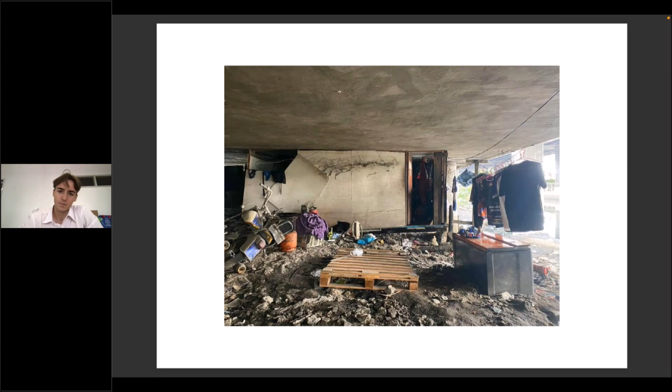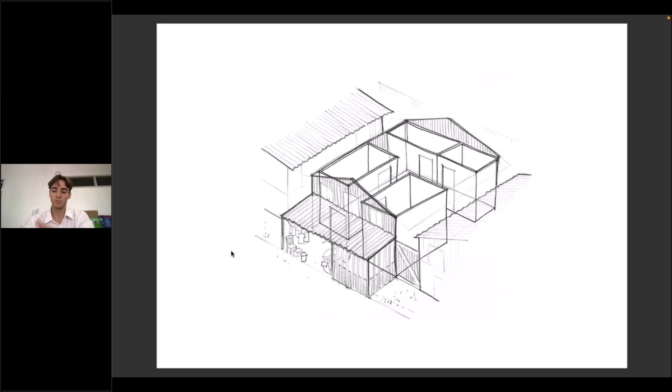They don't use them as proper houses, but we got this blue house example, which is a house that we could think one family is living in. But people in KLONG used to divide the space inside with cardboard, and in a house that is 1 story, they built 2 or 2.5 stories to have storage on the first floor, and like 3-4 families living on the second floor. So they used the existing infrastructure, which is this house with 4 walls, one roof, and one soil, and they made 4 families living in by just extending and dividing the space.

So from this, I wanted to work on this idea of really infrastructure, a framework in which the people who are living there could just design themselves their living spaces, and something that could be really adaptive and evolving, because we don't know if in the end they have to develop something really sustainable in KLONG. We don't know if they are going to be evicted in the end, because it's politically complicated. So it has to be both sustainable and really ephemeral and temporary in a way.

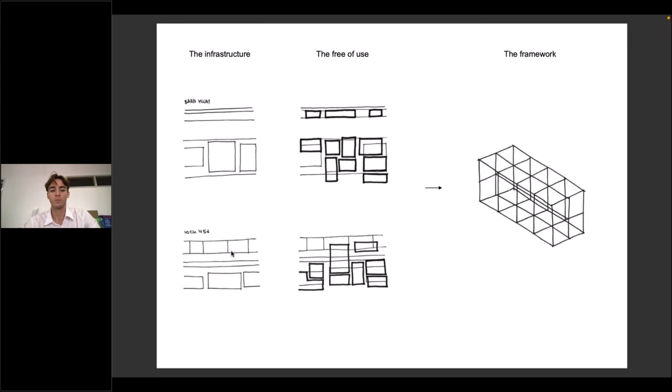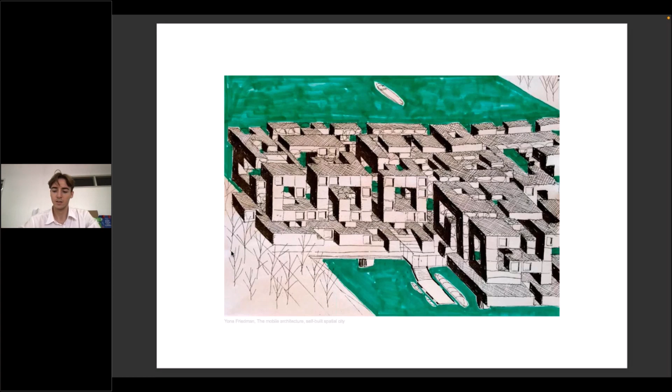So let's start a bit with some references of this idea, and like the drawings of Yona Friedman are a good example of this idea of framework city and self-building city from like a grid. And another example at another scale is the Kengo Kuma Chidori structural furniture elements that are made from one simple stick that can be assembled from one to a big furniture. So it's about this freedom of creating space as we want.

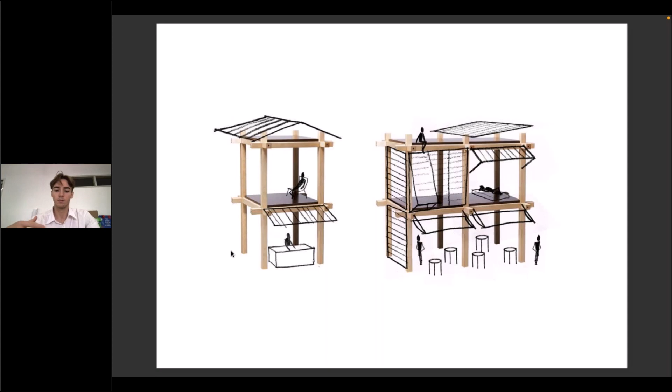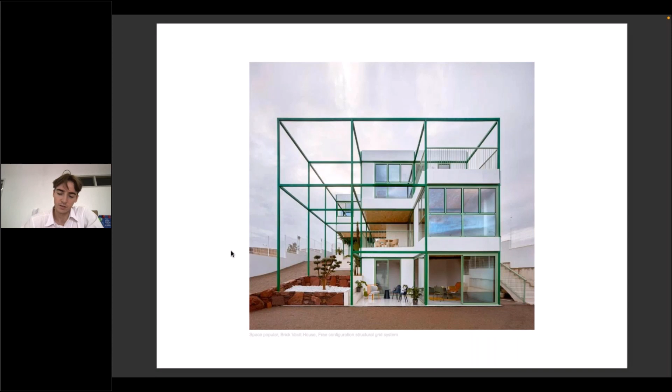And from this, we could imagine that people could just live in such a structural system and develop themselves the space, and that the space could be moving, assemble a new story if they have children, and depending on the family evolution, they could disassemble one place or something like this. So from that, we can see that, of course, it's something that a lot of architects are working on, about the framework, the grid, and the free adaptation of the space inside such frameworks, both on sustainable architectures or on really temporary ones, as the temporary shelters of Shigeru Ban, made of really simple elements like this and only fabric for people to live in.

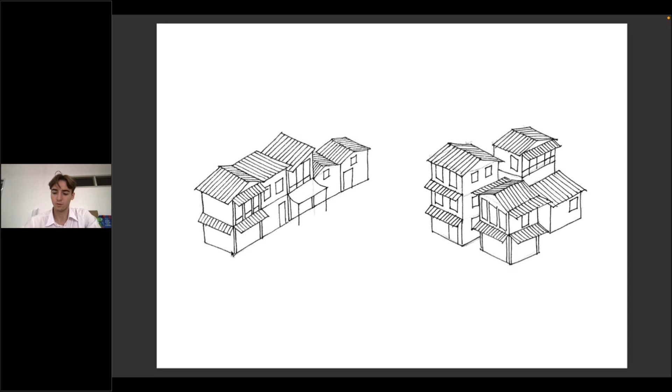So I started from a 4 meters basis, which is a scale that we observed from the existing KLONG houses. So it's a start, and from this square we could, of course, divide it and extend as people already do it in KLONG. And in the end, we could, of course, assemble multiple examples of designs from this 4 meters basis. And in the end, they could like slowly convert or design a new KLONG somewhere else, or just make a better place to live on the existing site.

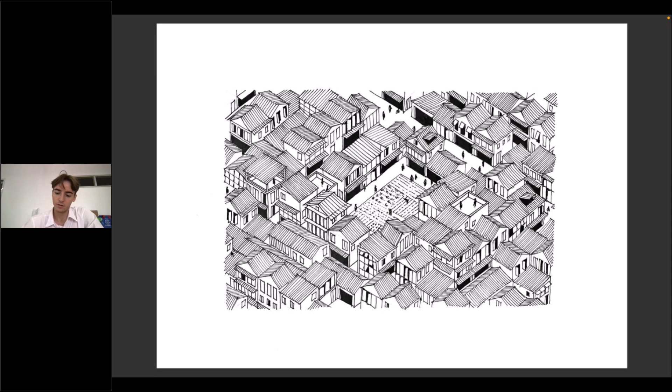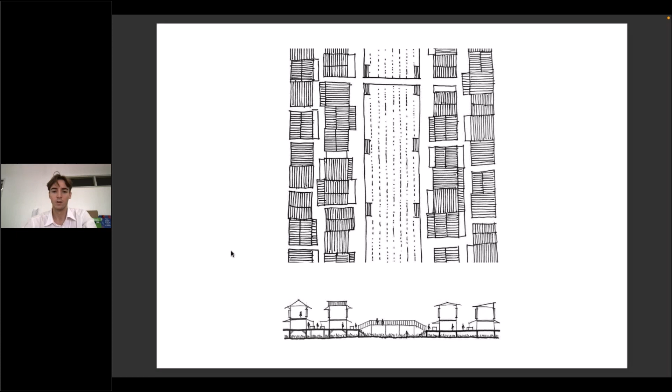Both on the Nongchok province, which is the province which I was talking about minutes ago. It's the land that is the first proposal from the government for them to develop a new slum outside of the city. So they could both develop something sustainable, as they did by their own means there. But my project is not going to be about this. It's just an example of how I want it to be both temporary and sustainable.

But I will try to develop prototypes, 3 prototypes as examples of the freedom of creation from this structural system, starting with a restaurant at the left, a market in the middle, and a laundry on the right-hand side, because they embody 3 of the main activities that people tend to have in the existing slum. It's the most common activities.

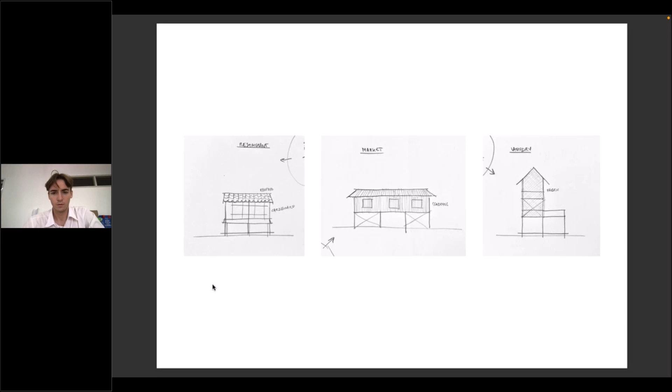So I will try to make them also embody the liberty, the freedom of design, and like the restaurant could embody some architecture, be more sustainable and well done, and maybe the laundry will be an example of something really more temporary and made of scrap, maybe more related to the poorness of the existing families there.

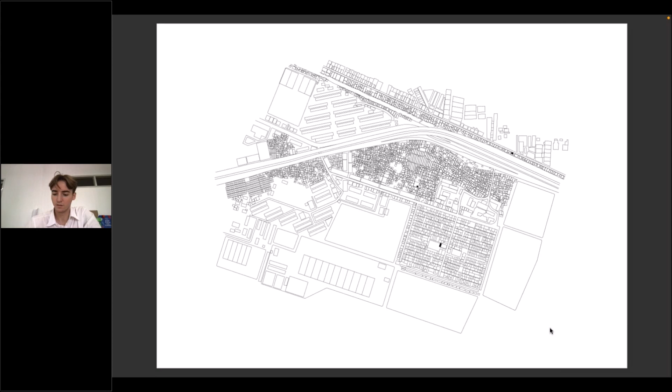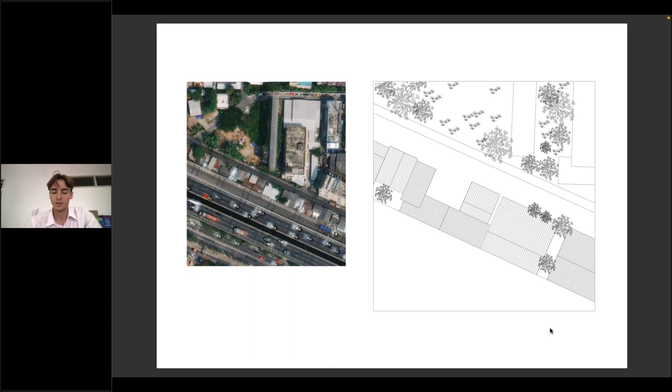And they will be like gathered throughout the slum to be in different communities, to show that this structural system can suit any place and any spatial situation, starting from this first site, which is the restaurant one, in the first community, Ban Kluai, on north of the site. So it will be a restaurant connected to the outside of the slum too. So it could welcome people from the outside of the slum as well as people from the slum. So the site looks like this. Actually, it's an existing house.

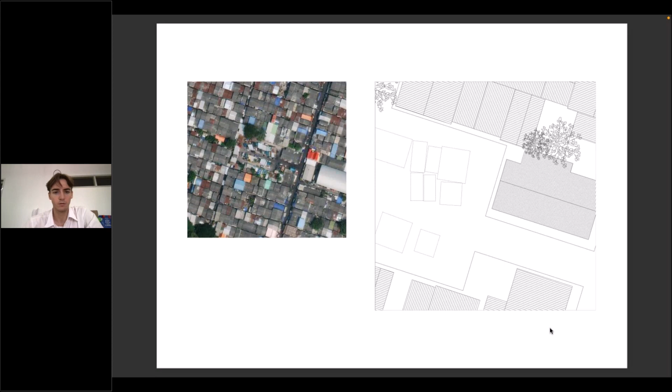The second site could be on the 70 Rai community in the middle, where there is a big parking area. Not that used. In fact, there are some marketplaces during the week, but it's mostly parking. So I could try to extend the existing market.

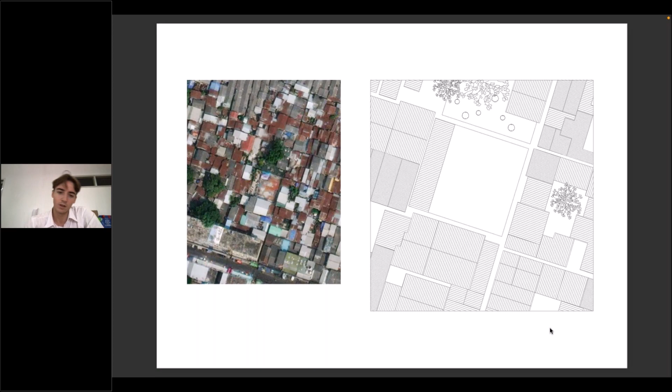And the last one is, I think, a public space designed by some architects. It should be a sport court, but it's not used, because when designers come to KLONG TOEY to design public space, it doesn't work as we can do in the centers of big cities, because the lifestyle of people is not to go hang out far from the house to meet friends. It doesn't work like this. So this concrete bank is quite abandoned, and I would like to design on this one.

And my first, it's still in work, of course. I didn't finish the project, but I worked first on the restaurant one, which is the most, I would say, expensive design. And it should be something really related to the lifestyle of people in KLONG TOEY, something which is both connected on the right to the public space, which is the street, and at the back on the left-hand side to some really more intimate space, closed space for the community people.

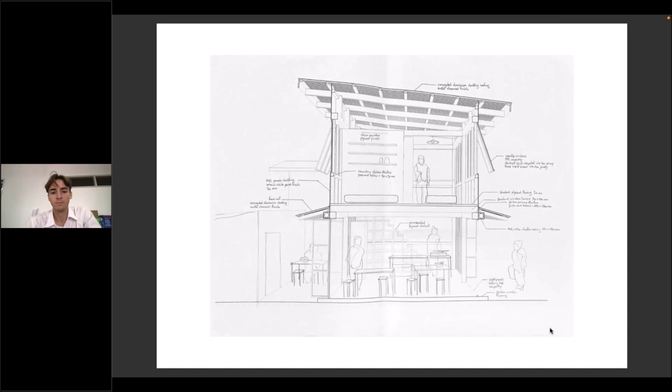And the first floor really opened and throughout, so that it's of course an open community space for interaction and workspace, of course, the working restaurant space. And on the upper floor, the family could live. So that's it for now.

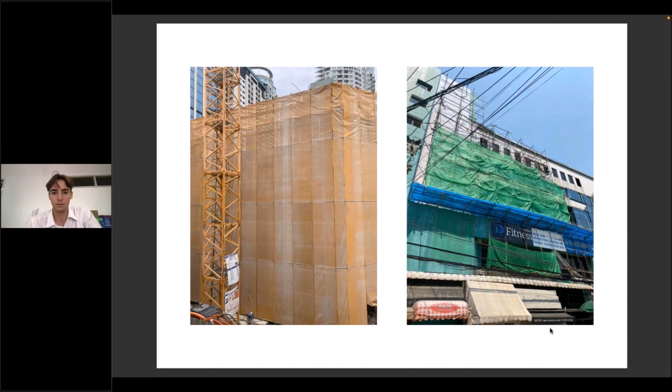And I have some research to design the other prototypes' architecture with scrap elements from the construction sites that are around the slum, and they have a lot of scrap of like this fabric they use for the scaffoldings, and I would like to try something really more ephemeral for these prototypes, but I didn't finish yet.

Thank you very much. This was impressive. Well done, this project.